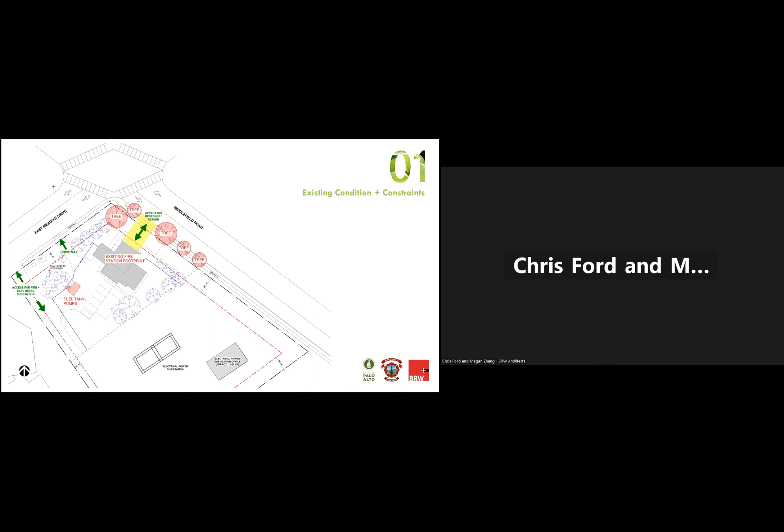Now, the orientation is the same as before, with Middlefield going left to right along the top and East Meadow on the left-hand side. The big green arrows start with the trucks, engine and ambulance. Instead of having to stop traffic and back in off Middlefield, now they'll be able to do a drive-through, coming in off East Meadow and into the back of the apparatus bay, driving straight in, then ready to go out on the call.

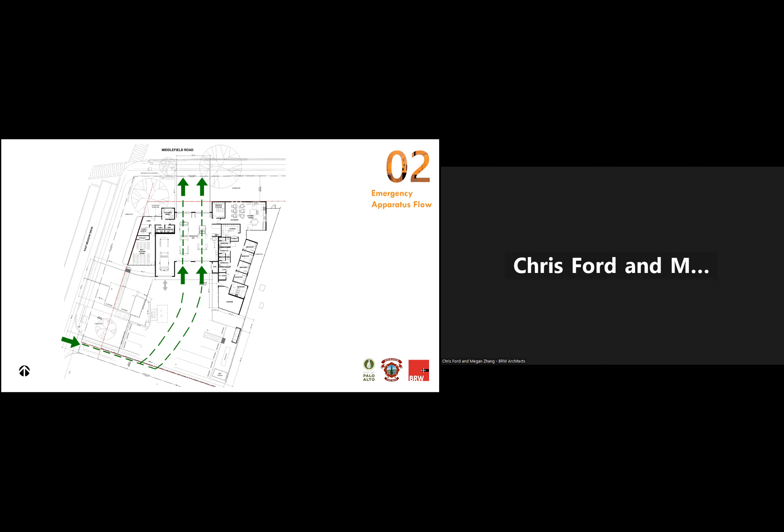The second component, in orange and green parking, is the visitor area. When people come to visit the station or come to a community meeting, their ADA parking space is accessed off of Meadow. The big orange arrow in the upper left is the main entrance, with a lobby and a firefighter there to greet you. The brown color is community, an open meeting space used not only for community meetings but firefighter training, in-house meetings, CERT meetings, CPR classes, and such—a flexible space on the left side of the apparatus bay.

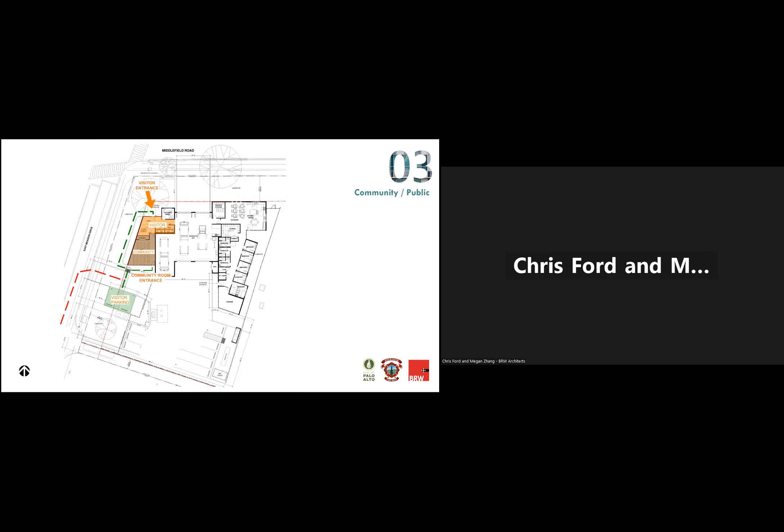The next component is their home, the living quarters for up to 6 firefighters, 24/7. Along Middlefield is the kitchen and dining area, an active space with open windows to outdoor dining and views on the right-hand side—placed along Middlefield because of the traffic noise. The sleeping area along the bottom is a row of bedrooms, all with outside windows, separated as far as possible from the noise along Middlefield.

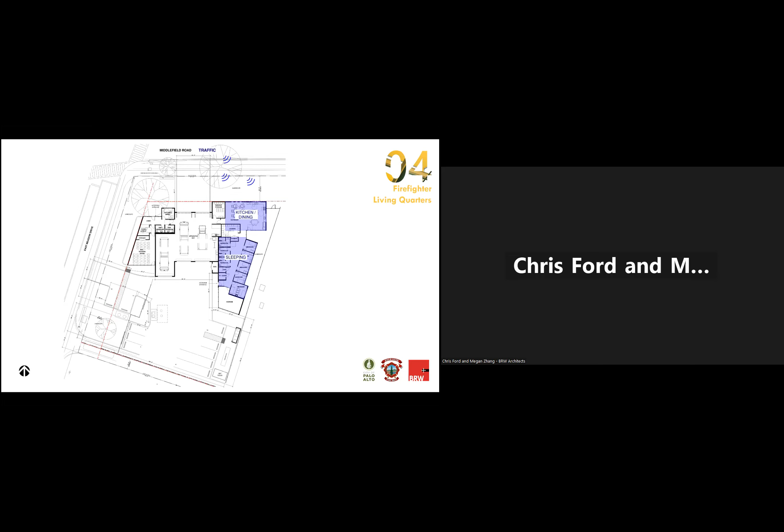Finally, the yellow is exercise, both indoor and outdoor. Like that earlier photo showed, this gets back to more of a standard size for the crews to get their exercise. It's also nice to have the ability to open it up and get fresh air into the exercise area, and to do some of their rotations outside.

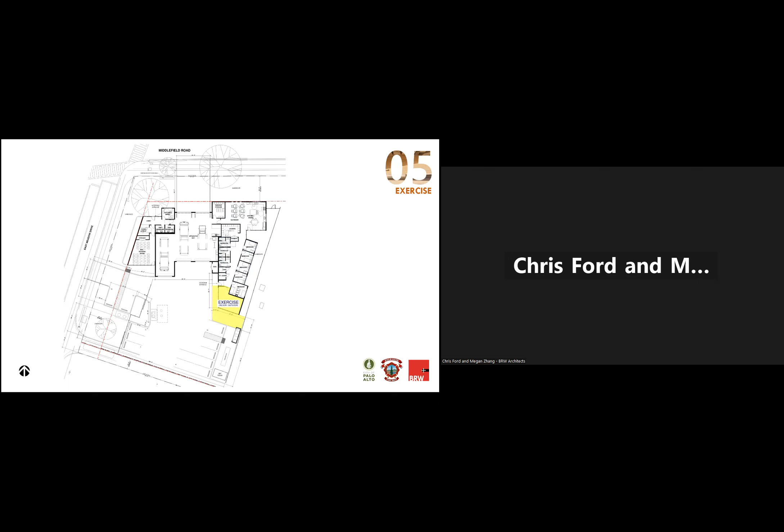I'm going to turn it over to Megan. She's going to talk first a little bit about our neighborhood and the existing building, and then move into some of the key components of the design and material decisions.

Hello, this is Megan. First I wanted to talk about the surrounding contextual site. The neighborhood of the fire station is very residential, but down the street we have the Little League field, so we considered that there will be kids walking along our site, as well as the church right next to our new fire station.

One thing we kept in mind, important to us, is the connection between the building programming Chris just talked about and the exterior design of the building—balancing the essential life safety operations with a good presentation of an open and inviting public image of what this station is going to look like and represent.

For our massing design, we kept in mind the pedestrian scale along East Meadow and Middlefield, knowing we have the Little League on one side and the church next to it. We needed to keep the pedestrian level in mind in how we designed the massing, while still having the apparatus space serve the trucks operationally, but also serve as a public safety beacon showcasing what happens here at the fire station.

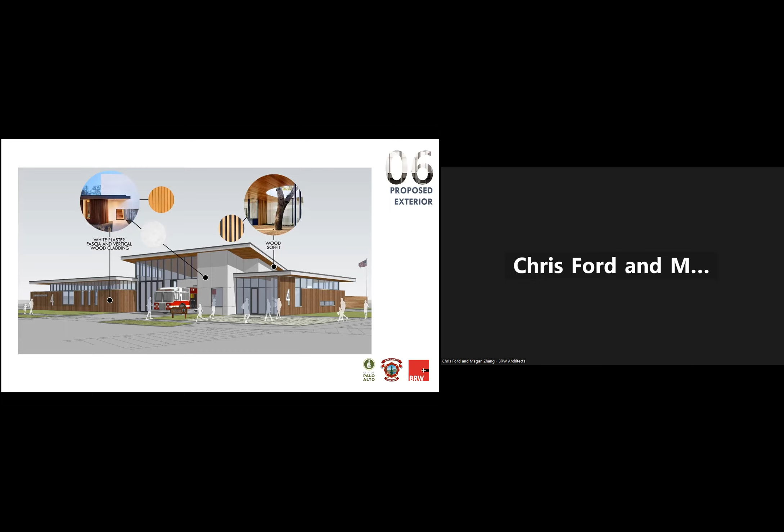Some of the material selections for the fire station keep a simple wood aesthetic material, incorporating white plaster fascia and vertical wood cladding. A couple things about our material selection: sustainability and easy maintenance for the firefighters stationed here; product availability, sourcing products close in vicinity rather than shipping them overseas; and durability and afterlife use—we emphasized sustainability and how all the materials will deconstruct and recycle after their use.

Here is a rendering of the site at the Middlefield and East Meadow Street corner view of the future fire station.

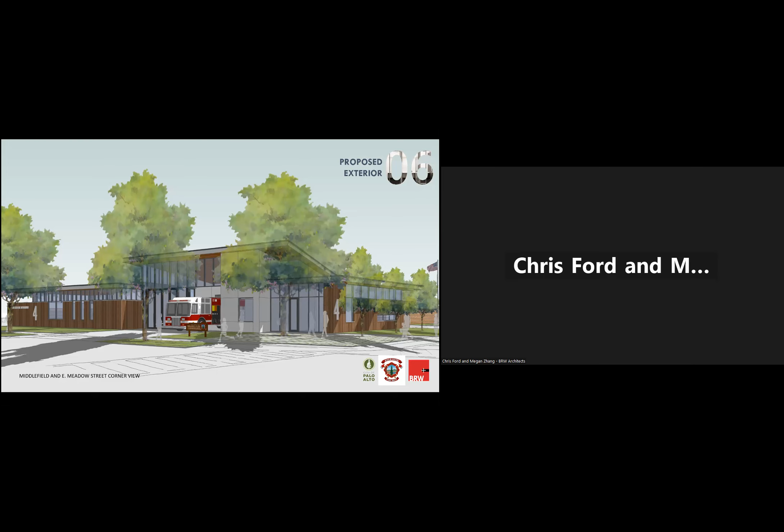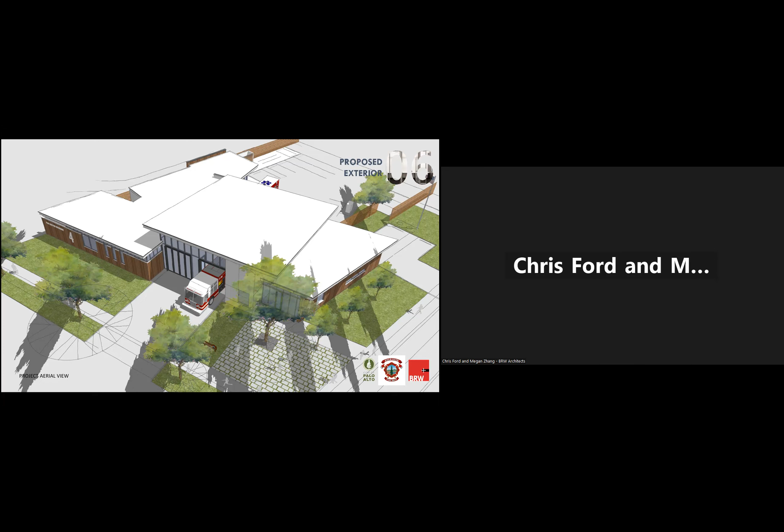Here is a site contextual rendering of how the new proposed fire station will look at the street corner, which, from this view, is lower than the church. The highest point of the fire station design currently is 25 feet at the apparatus bay, and it slopes back down into the back of house of the fire station in relation to the church.